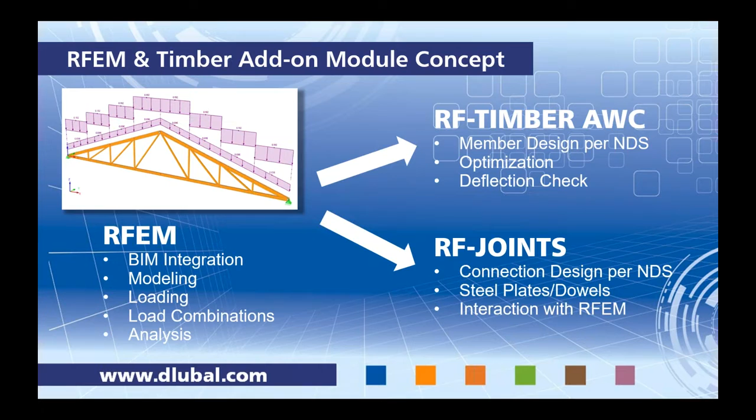The other add-on module, RF-JOINTS, as I mentioned, a new feature was added for the NDS code, both again ASD and LRFD for connection design. It's utilizing steel plates and dowels. And again, I'll show you the interaction that the add-on module can have with RFEM in regards to the actual stiffness properties of a connection and how that affects our internal forces. So with that said, we can jump directly into the RFEM model.

So for the sake of time, I did go ahead and create this general truss here, and I am in a 2D environment. So in order to create this truss, I used our structure generator. If we go up to Tools, Generate Model, under Members, you'll notice that we have several options here. A few of them are grayed out, and that's simply because I'm in a 2D environment. But for this example today, I used the 2D truss option. This dialog pops up. You can see all of the different truss types that we have. We have the option to set our diagonals, different directions, and the rest is pretty self-explanatory.

We simply give it the number of bays, the total length. It's a pretty large truss for today, so we set this at 85 feet and the total height at 15 feet. Then the program asks us to set the cross sections. So for the upper chord and lower chord, I just gave it general glulam timber members, as well as those specific properties for a glulam. I can press my little info button here to see the cross-sectional properties, a 6x12 for my upper chord, and for my lower chord, I modeled a 6x10.

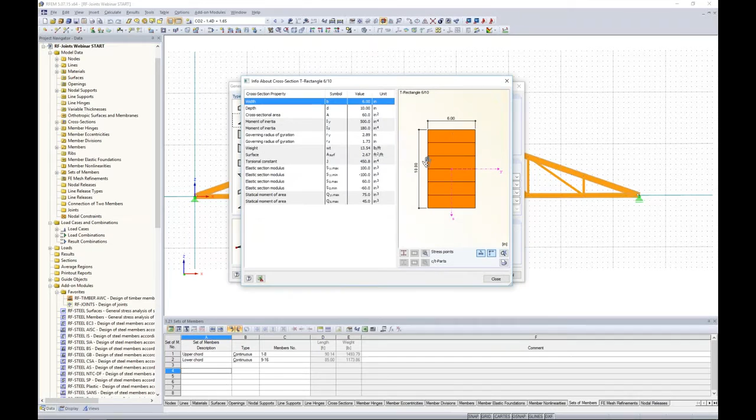For the diagonals and verticals, these are just more post members, 5 inch by 5 inch, Douglas fir larch, so a softwood here. Again, the member properties can be viewed. Now, the program automatically sets the member type to beam for the upper and lower chords, and you'll notice that the diagonals are set to truss.

For any type of modeling software, finite element, we typically have different member types. For our program, beam type is anything that would be a beam or column. A truss would be the same thing as a beam, but we've automatically applied the moment end releases to those members. So truss makes perfect sense for all of our internal members within this truss that we don't want to transfer any moment to our upper and lower chords.

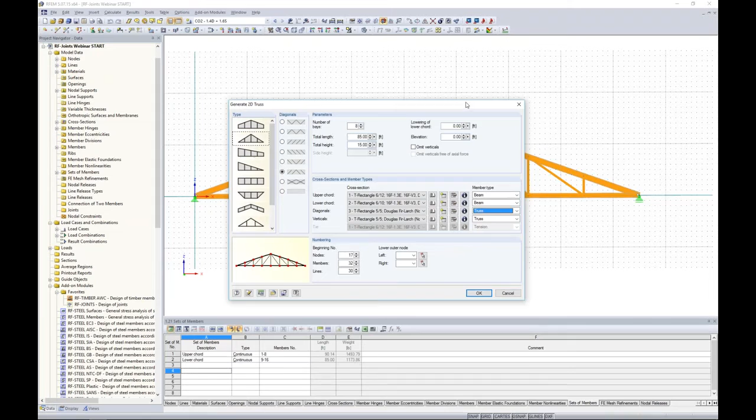So leaving these settings as is for the member type, we press OK, then we'll get the generation of our timber structure here. Then I did add a pin support on my left-hand side and a simple roller support on my right-hand side. Now, the other thing that we need to take care of is that when I did generate the truss, a fully rigid connection was available at the top of the truss, also on the left and the right.

So you'll notice that I've applied a simple pinned member end release for the top of my truss, just one of the members. You can do so by editing the member, double-clicking it. You'll notice we have member hinge at the start and member hinge at the end. I just created a moment release, which you can see here in the two-dimensional direction about the local y-axis. I did so at the beginning of the member on my left-hand side and the end of my member on my right-hand side. So modeling is essentially complete for this simple timber truss.

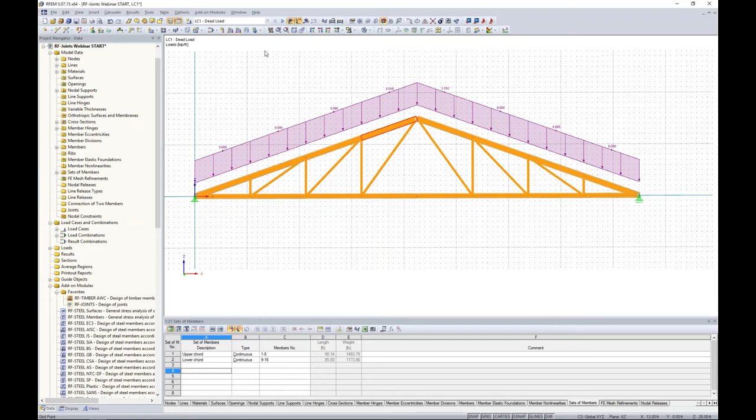I did also apply some loads, and I have two load cases. You'll notice in my drop-down box I have dead load and snow load. My dead load, if I display it, is just a simple member load, 0.08 kips per foot. The snow load, on the other hand, is 0.12 kips per foot in the projected Z direction. So we're taking into account this member angle and how that load directly applies to these upper chords.

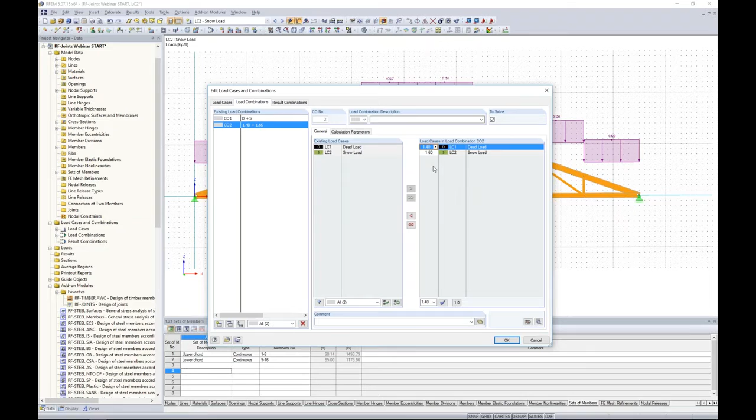Now I also created a couple of load combinations just manually, and maybe if we enter the load combinations dialog box we can see this. So we do have the options to automatically create these load combinations, like I mentioned, per ASCE 7 for example. But for the simplicity of today's example, I created two load combinations. The first could be considered an ASD load combination where my load factors are 1.0 for dead load and snow load. My second load combination is maybe an LRFD load combination where I have applied the load factors of 1.4 and 1.6. You can see in this drop-down box we have quick access to them, or we can overwrite them with whatever load factor we would like.

So now you have the ability to toggle between the load cases and load combinations, and we can run our first analysis. I can go to calculate all, and we'll see within a split second the model will be solved. So we are still in RFEM, we haven't touched any of the add-on modules yet. So once we run this analysis, in our project navigator over here, we have the results tab available.

And we can, for example, view everything graphically such as global deformations. We can change the display factors here. What may be a little bit more interesting is to take a look at our member internal forces. Here you can see we have our axial forces. We have some pretty high tension forces on the bottom, and high compression forces at the top, denoted by the negative magnitude sign here.

Taking a look at shear forces, I can always increase my member diagrams here. And lastly, we have our moments. We should have no moment transfer where I put in those moment hinges, as well as along our diagonals and verticals here. Same thing for support reactions. These are controlled here graphically within our results in the project navigator dialog box. And you have full control over colors, sizes of fonts just by going to Options, Display Properties.

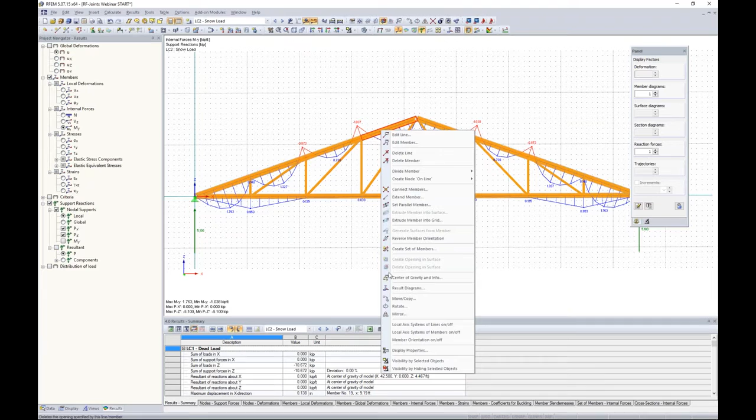Now, this is great graphically, but sometimes we want to see a little bit more information as it relates to the member. So we can always right-click on a specific member and choose Results Diagram.

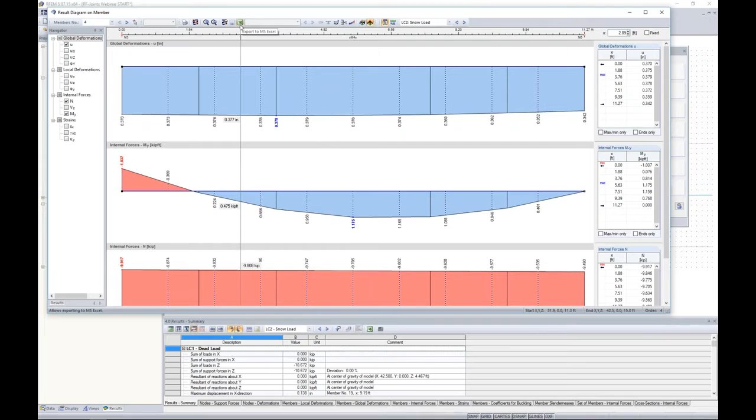Now you'll see the entire member here. We can turn on more graphs such as internal forces, deflections, and get a more realistic view of what's going on along the length of the member. You can print this off directly to our printout report. You can export directly to Excel for further sorting. So a lot of powerful capabilities in just viewing our analysis only.

So now that we have run a full analysis, that's great, but typically as design engineers, we want to move on to code checks. So this is where we are going to make the clear distinction that we're going to utilize an add-on module. In the data navigator over here, you will see the long list of add-on modules. We do work in the add-on module system because we really want to cater the software to your needs. Not everybody is going to be in the Chinese steel design, for example, so why should you pay for it? So we, again, are trying to cater towards your specific design needs.

We also have them organized a little bit better with this add-on modules drop down at the top here according to the different materials and applications, dynamic analysis, things like that. So for today, we will launch the RF-TIMBER AWC. Now, to begin with, you'll notice we have both ASD and LRFD, so that's nice. Some other software programs for timber design only give you ASD, for example, so you have complete control over which design method you would like to run. Today, we will choose the LRFD.

Now, the ultimate limit state design, you'll notice that my load combinations and cases were brought in from RFEM, so I don't need to redefine any of that. So ultimate limit state, we'll choose our LRFD load combination, and serviceability, we will choose our ASD load combination.

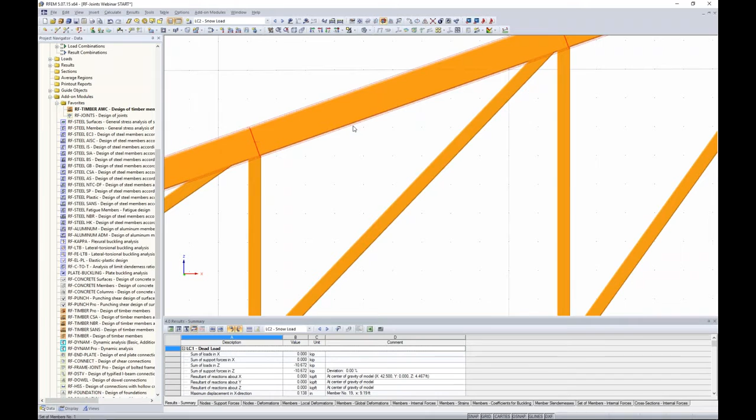Now, the next thing to go ahead and define are which members or sets of members would we like to design. So let me quickly explain that when we go back to this add-on module, if I zoom in here, the program automatically created a set of members with the truss generation for my bottom chord, and I also have a set of members for my upper chord. What I wanted to mention is if you do zoom in, you can see a faint dotted line around it. I know that's hard for you guys to see, but if you were in the software, you'd be able to hover over that and see it's a set of members.

A set of members will essentially be designed like a continuous beam. You know, we don't want to optimize one of these individual members different from its adjacent members. We want to get a code check for this entire bottom chord. So that's where the sets of members comes into play.

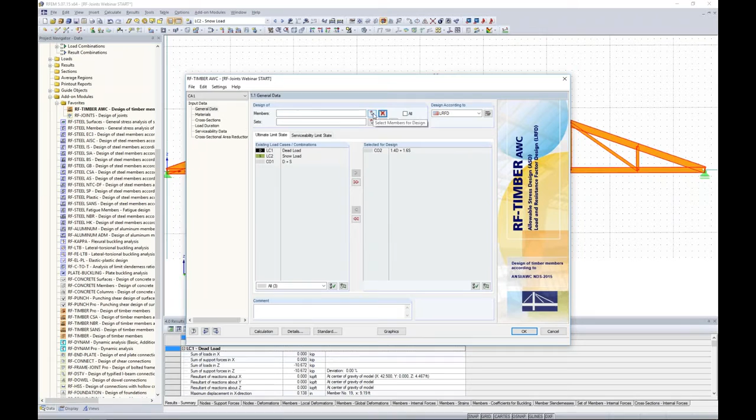Now the default is to select all members. I'm going to clear this, and for my member design, I'll scroll in here and I can just use my selection box, similar to what you would find in AutoCAD, for example, to select all of my internal diagonals and verticals for my member design. And for my sets of members, I simply choose graphically the upper chord and the lower chord, and we click OK. So now we have the distinction between members and sets of members for what we'll be doing for design purposes. Now all I need to do is to simply move down the list.

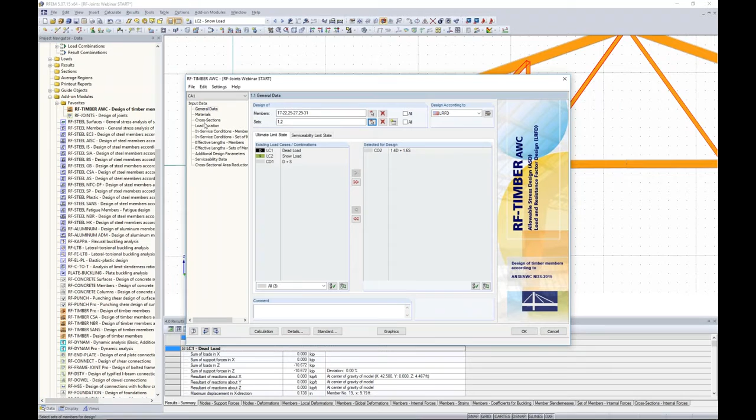Next we will go to materials. Again, everything is brought in from RFEM, so I don't have to redefine my materials, my geometry, my cross sections. All that we're doing in this add-on module is giving some further design information related directly to the NDS code.

Now you'll notice that we have two bright red materials here, and that's just because when I open up a new model, concrete and steel are defaults within the program. I can delete these back in RFEM if I wanted to, but all the program is telling me is that these are not applicable in the Timber add-on module. That makes sense. But our two materials that we did define to our members back in RFEM are applicable. I can click them and view all of the material properties that will go into the design of this member.

Again, cross-sections, same concept. The member cross-sections are brought in from RFEM. I can view some of the cross-sectional properties here if I'm interested in them.

We can move on to load duration factors. We assign dead load and snow load to the applicable loads that I applied in RFEM. The program is smart enough to know what load duration factors to apply. We can always use our drop-down box to adjust these, but even more so, there is the standards button down at the bottom of the dialog box, which will show you every single factor going into the design process within this add-on module, such as the load duration factors.

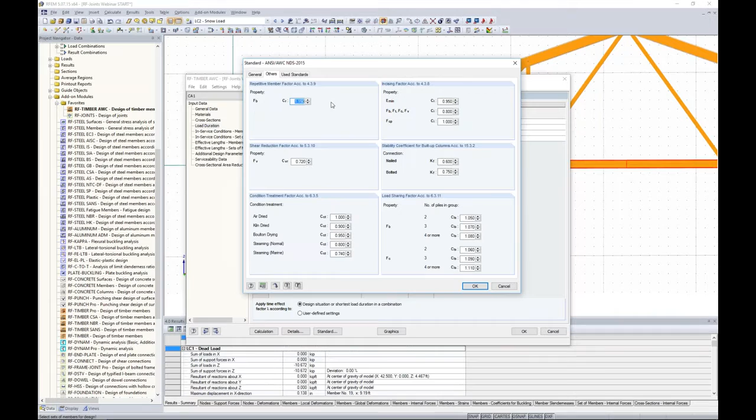What is nice is that you can adjust these if for some reason you don't fall between 10 years and 2 months, but somewhere in between. That's completely up to you. You'll notice other factors such as temperature factor and wet service factor. If we go to the others tab, there's repetitive member and shear reduction factors. Again, this is all the information from the code. Under used standards, we list which standards are being utilized for the design, and at the end we give you references to these standards as well.

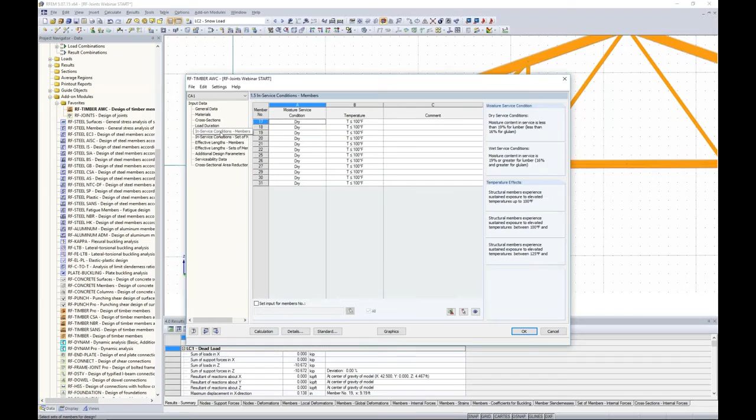Moving down the list to in-service conditions, this comes from our standards button, moisture service conditions - are the members dry or wet? Our temperature ranges, we can change these if we'd like. You'll notice we have 2 separate tables for members versus sets of members. This is so we don't group everything together. I think it's laid out a little nicer when we separate members versus sets of members, and then we can control those factors individually.

Effective lengths for members - this is stability checks. You'll notice we have buckling about the weak axis, buckling about the strong axis, and lateral torsional buckling. I'm going to assume for all of my internal diagonals and verticals that buckling about the strong and weak axis, as well as lateral torsional buckling, is a concern. So I'll leave everything as is and let the program determine if this is okay based on my design.

Now the effective lengths here default to the full member length, but you can easily control these lengths by typing it in or graphically using the measuring tool here, so you have complete control over this.

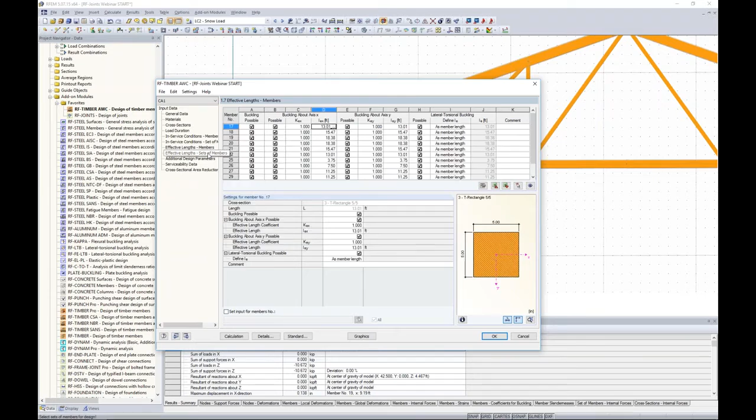Our sets of members is on a separate table. For my upper and lower chord, I'm going to assume that I have complete lateral bracing along the length of the member. So weak axis buckling about the local x-axis, which I have my axes shown down here, is not a concern. And it would be the same thing for my lateral torsional buckling - this is not a concern based on my connections or lateral bracings.

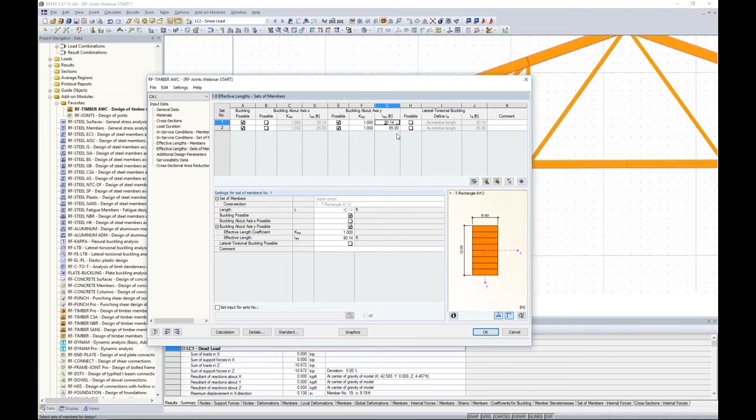All I have to do is simply uncheck the box. Buckling about the y-axis or strong axis, I am still concerned with this, but right now it's set to the full set of member length - so it's pretty large, 90 feet and 85 feet. Maybe for uplift wind purposes, I have much smaller unbraced lengths - for example the upper might be 3 feet and the lower 3.5 feet. As a design engineer, you always want to pay careful attention to your unbraced lengths because this significantly affects our stability design.

Moving on to additional design parameters - this is shear reduction factors, edge bonded. This refers to our glulam members for our upper and lower chord members. We have the code references here, and again the standards button will tell you what those factors are. If we scroll down further, here's our incising factors and repetitive factors for our post or brace members within the truss.

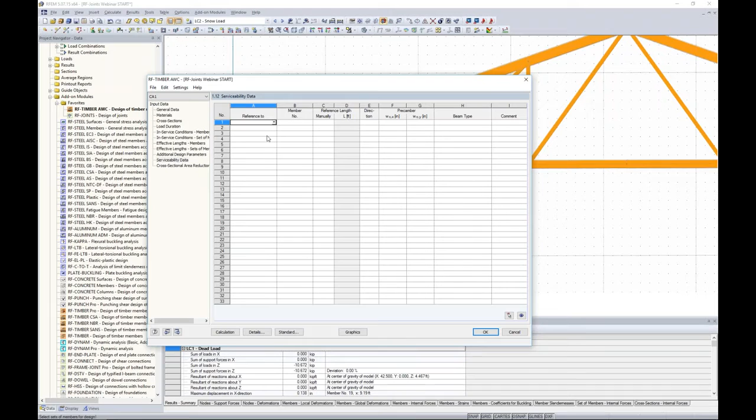We can move on down to the serviceability data - here is just deflection checks. We can check every single member in our model, or maybe we're only concerned with checking a couple of members. For this example, I'll graphically choose perhaps one of my diagonals that I want to check deflections for. I click OK - the manual reference length is set to the full length of the member, that's fine. Do I have a pre-camber? If so, I could put this in here. And lastly, I need to specify if this is a beam or cantilever.

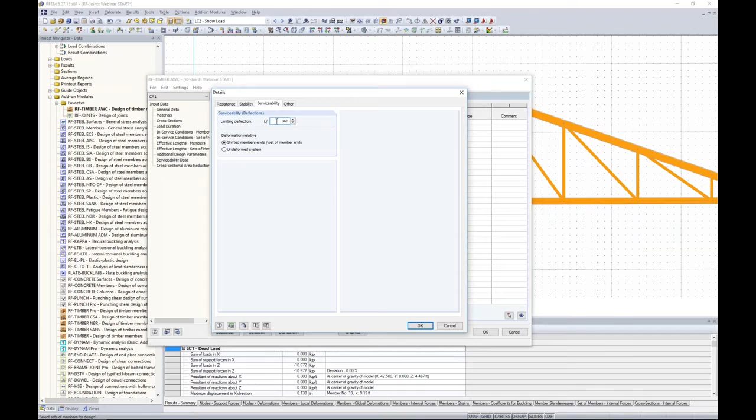Now I can do the same thing with a set of members - maybe I'm interested in my bottom chord deflection. All I need to do is graphically select my bottom chord here. The full reference length is set at 85 feet, and again we just use beam type beam. Now the question is, what deflection ratios am I comparing this to? Where can I control that? Well, under the Details tab under Serviceability, here's my limiting deflection ratio - you can see the default is set at L/360. Now for cantilevers, it will always use half of this ratio that you set in here.

Then you need to specify whether the deformation is relative to the shifted member ends or the undeformed system. This may be better known as relative versus absolute deformation. This is where we can control this limiting deflection ratio and change that if we'd like to.

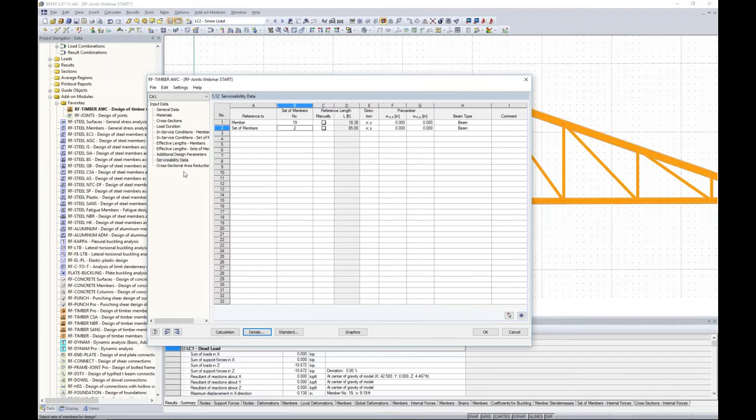Lastly, we can move on to the cross-sectional area reduction. This is if we have a notch within our member, maybe at a connection at the ends, or maybe the member is sitting on top of a wall or another member, and we have to take this cross-sectional notch out. We can account for this by selecting the member graphically, then giving the notch location, whether that's the start, the end, or within the inner span. Then we give the notch the geometry, and the program will automatically account for that cross-sectional area reduction. It's smart enough to only compare internal forces at this notch location for design purposes, meaning we don't have to reduce the entire cross-section of our member and get an over-conservative design. Just a nice additional feature if you have this scenario.

For our case, we won't do that today. Now, before running the calculation, I want to quickly run through the rest of the details tabs, to see what's exactly going on behind the scenes with some of these other options.

The first one under resistance is consideration of connections, the reduction of limit tension stresses. If I check this, it means we can account for the occasional weakening of a cross-section at a connection. All I need to do is select a node, and give the connection length, maybe 6 inches or 1 foot, and I can reduce the stress ratio inside that connection. The default is set to 60%, and the stress ratio outside the connection can be kept to 100%. Now when we're looking at our design, the program will flag you if at that particular node you're exceeding that 60% stress ratio. Just an easy way to take into account the weakening at a particular connection of your cross sections.

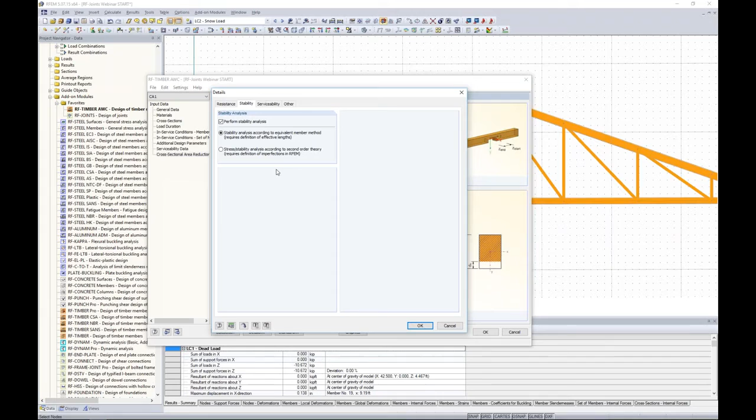We're doing a stability analysis according to the equivalent member method. The NDS says to take into account secondary effects within the design phase for our structure. This is very different from steel, for example, which tells us to take into account secondary effects in the analysis section, so things like P-delta, stiffness reductions, and notional loads are all taken into account in RFEM. Timber is different in that we have these factors added to our bending capacities.

Back in RFEM, if I open up my load combinations, you'll notice that under calculation parameters, it is always default in the program to run a second order analysis for our load combinations. This will take into account P big delta and P little delta.

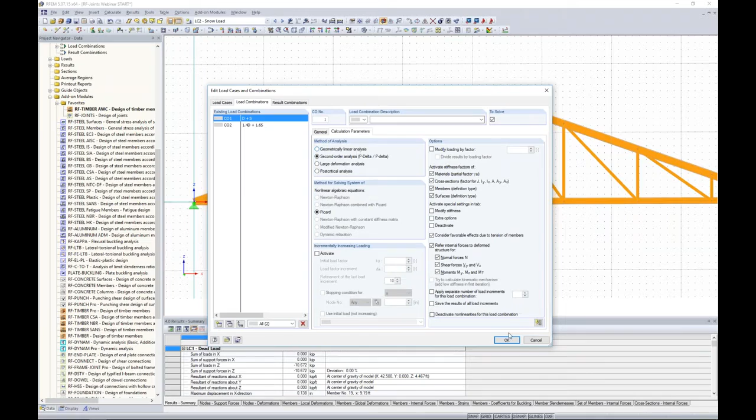So perhaps you have an existing structure, or you're just really close on your design checks and you don't want to increase your member sizes. Technically, you can go back into RFEM, change this to a geometrically linear analysis, and then take into account these second order effects within the add-on module only, the design part. Now, it is typical for most engineers to just leave on P-delta analysis in RFEM. Therefore your internal forces are a little higher, but it's a more conservative route to take.

The other option here is stress stability analysis according to second order theory. It requires definition of imperfections in RFEM. If I check this, I'm telling the program that under effective lengths, the buckling for strong and weak axis will be taken into account with the analysis, maybe with stiffness reductions or notional loads, imperfections, things like that. With lateral torsional buckling, there's no way to take that into account on the analysis side, so I'd like to still do a check with that on the design side. Regardless, today we'll stick with the default of checking our strong and weak axis buckling.

Serviceability we've already been through, and on the other tab, cross-section optimization. Design ratios are maybe more around 0.8, possibly 0.9, typically not 1.0. So for optimization of your members, which I'll show you in a second, you can change this to 0.8, for example, for design purposes.

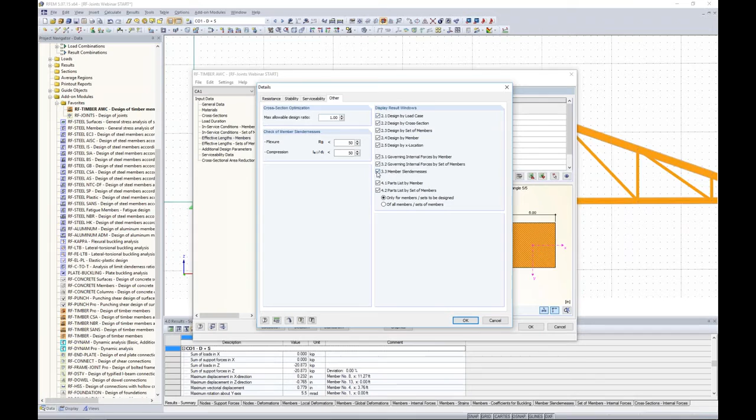Check of member slenderness. If member slenderness is a concern, here are the ratios we have set according to the code for flexure members and compression members. You'll need to activate 3.3 member slenderness here for our result windows if you want to check for member slenderness. That's pretty much the concept for all of the input data, and now we're ready to run our first calculation.

You can see that it solves within a quick second. All it's doing is bringing the internal forces into this add-on module from RFEM, and we apply the NDS code for our design. Now we have our results tables available, and we can view the design by load case.

We can view design by cross-section - we have three different cross-sections here. Maybe we want to view design by sets of members or by each individual member. What's also great is that as I'm clicking through these tables, it's synced to the graphics view in RFEM. Even the X location of my controlling internal forces line up with my tables here.

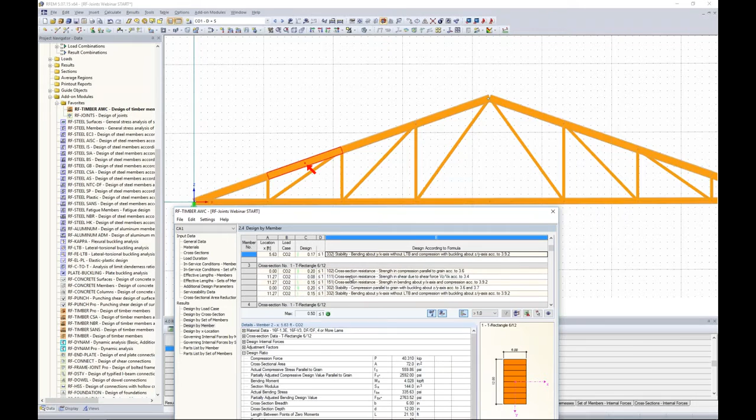Something else I really pride ourselves on, because I know this isn't available in a lot of other software, is that we give you the code check for everything within the NDS. So we're not just giving you the controlling code check for each member, but you can actually scroll through and view the different checks individually. Even more so, we give you all of the variables that go into that code check, as well as the equation references. So if you have the NDS code right in front of you, here's the equation for your C sub P factor - you can quickly flip to it and understand where those numbers are coming from. A very powerful feature.

Now you can always export directly to Excel to do some further sorting, and as you can see, we have this nice big green smiley face because our design check is only at 0.5. So it looks like we're doing quite well with our design. We can also view some of the governing internal forces by member if you're interested in that.

And lastly, we have a parts list by member, or a material takeoff.

As far as optimization, just to quickly touch on that, if we go back to our cross sections table, you'll notice that the max design ratio for each cross-section is given. I think we can see that our top chord is pretty low, 0.22.

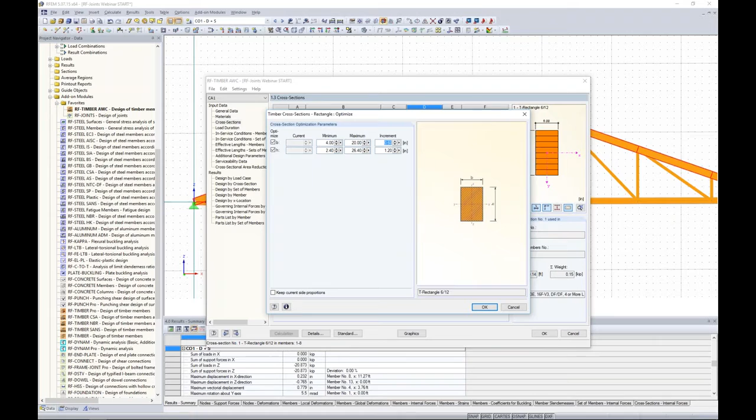So maybe this isn't an ideal cross-section to have, and rather we'd like to optimize to something more like 0.8. We control that under our details setting, where we can choose the option to optimize. When I click yes, all I need to do is give the program some dimension ranges for both my width and my height, like maybe 4 inches to 20 inches with an increment of 0.5 inches. Then we rerun the calculation, the program will optimize, and we can continue on using these new section sizes.

For connection purposes, I'm not going to do this, so we'll just stick with the design that we're given.

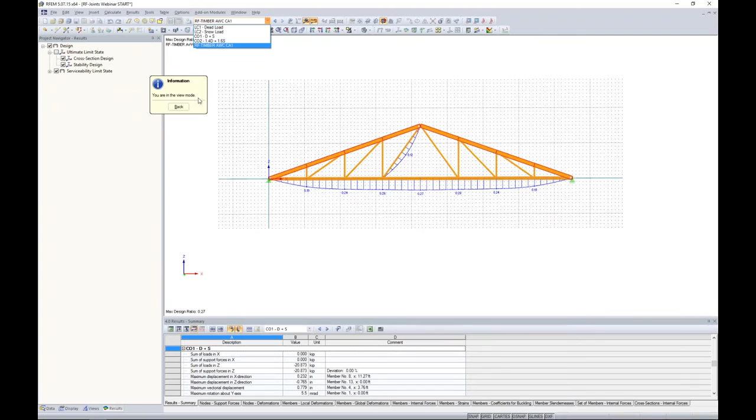Lastly, we can view everything graphically. We're back in RFEM, but we're still technically in the add-on module, which you can see from the drop-down box and this little dialog box here. We're still in RF-TIMBER AWC. So I can view my ultimate limit state designs, which you can see graphically here, and I can turn on my panel.

Well below 1.0, we can print these off. Serviceability we can take a look at. Remember, we only check serviceability deflections for our set of members down at the bottom and one single member here. So graphically, we can view everything rather than just the tables.

So that basically sums up the member design. And the next thing that we want to move on to is connection design.

So I can go back to my data tab, and I have my other add-on module here, RF-JOINTS, and I will launch that. Again, just another simple dialog box, which is the add-on module, taking in all the internal forces into this add-on module. We just need to further specify some information.

You'll notice that we do have steel and timber. Unfortunately, at the moment, steel is only per Eurocode design, but at some point in the future, we do plan to add AISC as well as CSA steel connections.

But what is exciting is that we did add the NDS 2015 for our timber connections. You can see we have both ASD and LRFD available. Maybe to just continue on from our member design, we will stick with LRFD design. We have steel to timber connections.

Now the joint categories, we either have general dowels we can choose from, or you can also see that we have bolts. For today, we will be going with general dowels.

Now, 3 different joint types. We have the first joint type, which is main member only. Maybe you have the cantilever of a beam from a wall, for example. Well, that would be applicable for this type of connection.

The second connection type would be with a continuous member and a second member framing in. That might be something more like this connection here, where we have our continuous upper chord and we have a vertical framing into that continuous member.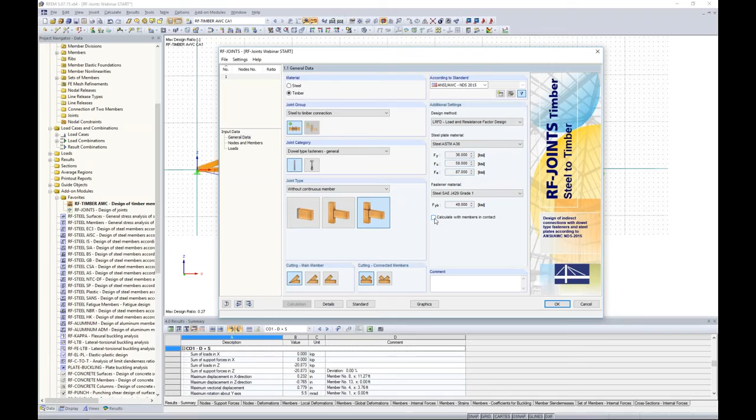So we don't give you design for these members in contact, but it's just an additional check to notify you if we do have some extremely high pressures from one member to another. So again, we just simply work down our list here.

We'll move on to nodes and members. Now in our graphics view, you'll see our truss brought in from RFEM, and nothing's highlighted right now since we haven't selected any nodes. This can be imported from the structural model, or we can set it manually here. If we choose set manually, this allows us to define any type of connection we want, including materials, cross sections, and different angles, so we don't have to use what we modeled in RFEM.

For today, it makes more sense to import what we've already modeled in RFEM, so we can do a further connection design here. The first thing I want to do is choose the nodes I'd like to consider for my first connection. I'll choose node number 1 on my left and node number 2 on my right. These will be identical connection designs.

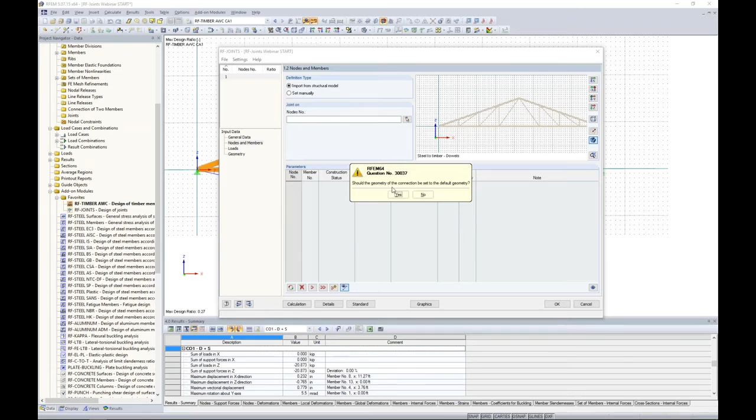Should the geometry of the connections be set to the default geometry? Yes, I want to bring in what RFEM already has modeled. Now you can see I can zoom in here and my members are highlighted at that particular connection. At node number 1, the program automatically assigned the connected member to member number 1. Using my dropdown, I have connected member, main member, inactive. Member number 9 at the bottom is set to the main member. My materials and cross sections were automatically brought in from RFEM, and even my angles were automatically determined, so I don't have to worry about redefining that information.

Quickly jumping to geometry, our picture of the connection will be populated here, and I think we're all in agreement that this is not the ideal connection. Nobody would cut these two members right down the middle and create a connection looking like this. So how do we change this? Back on the General Data tab, this is where the cutting of the main member and connected members is affected. I'll change this to the second option, which you can see here graphically.

Now jumping back to my geometry tab, this is looking a little bit better. But ideally, all of these internal forces from our upper chord should be bearing down on our bottom chord. Timber isn't very strong when considering these internal forces bearing down here, so I want to flip-flop these, so to speak.

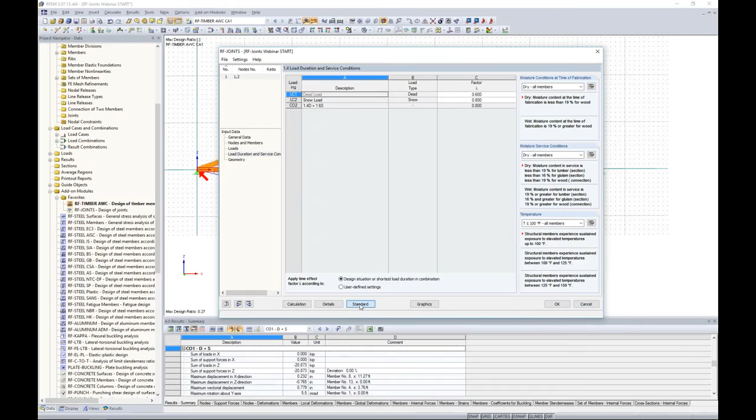So now that we've defined our geometry under nodes and members, we can move on to loads. What load combination would we like to use for design? Since we're doing LRFD design, I'll choose my LRFD load combination. Load duration and service conditions should look familiar from our AWC member design module—things like load duration factors, moisture service conditions, and temperature. If we pop open this standard, here's where we can see all the different factors applied for the connection design.

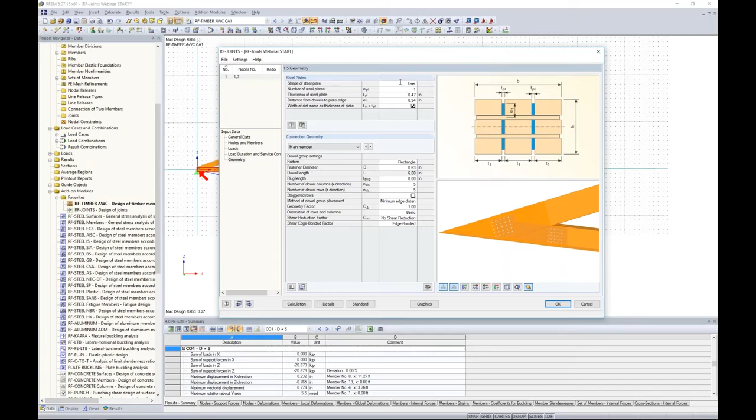We can scroll through these—everything's coming directly from the NDS code. Lastly, moving on to geometry, this is probably the most important part, because here is where we define our dowel layout and our steel plate layout. It's pretty self-explanatory; all I need to do is work from top to bottom, filling out each variable. Now, the shape of the steel plate—the first option is user-defined, which you can see is basic, just rectangular sections at my upper chord and lower chord.

The second option is Convex Hull. What the program will do is its best attempt to simply connect these two rectangles with a straight line. So maybe this is something a little bit more similar to what we'd see actually fabricated. That's an option if you'd like.

The third option is rectangle. You can see this is not ideal for our connection today, but this could be ideal for another scenario. We'll just stick with this user-defined connection for now.

Now the number of steel plates can vary anywhere between 1 and 5 steel plates. For the first run, we'll stick with 1 steel plate. We do need to give the thickness of the plate. We'll set that to 0.5 inches.

Now the distance from the dowels to the plate edge, E1, we do our best to give you all of these variables graphically as well, so you can understand exactly what information you're entering in here. So for that edge distance, we will set that at 1.2.

Now, is the width of the slot the same as the thickness of the plate? Well, if this was not, then I could specify the slot thickness different from the thickness of the plate if I would like to.

Moving on to the connection geometry, you can see that we have the main member here, or we have connected members. So we first want to start with our main member. The pattern will always be rectangular.

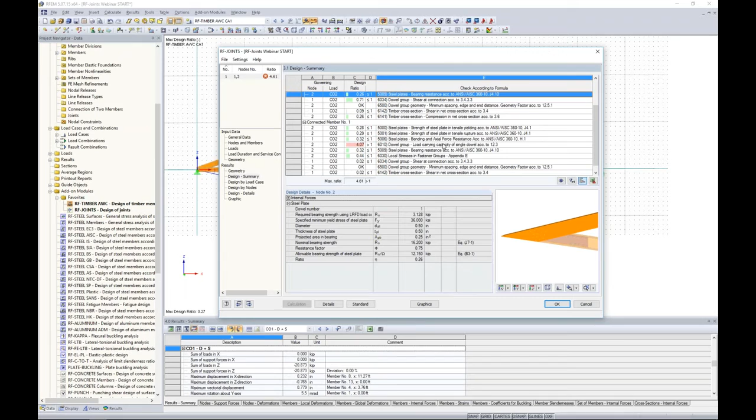Scrolling down to my connected member, I obviously have a huge problem here as well. My load carrying capacity of a single dowel is exceeded.

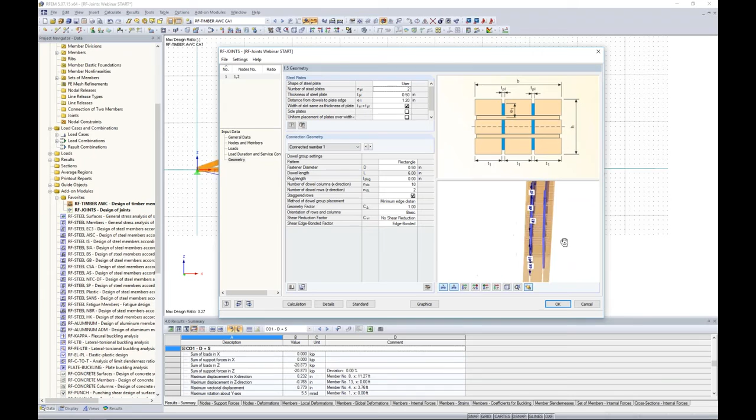So before checking out the rest of the results, let's go back to our geometry and make some changes. Maybe the first change is I'll add an extra steel plate. It's asking if I want to delete my results - yes, that's fine. Now I can rotate this view around, and you can see these steel plates are shown graphically quite nicely.

There are a few other settings that came up with adding 2 steel plates. For example, we can set these as side plates if we wanted. Rather than being embedded within the glulam members, you can see now they are side plates. For us, we'll uncheck this option. The third option is uniform placement of plates over the width, which you can see from this cross section. If I uncheck this, I can set my distance between the plates, T2, here in the center - maybe something more like 2 inches. So you have control over that, and it doesn't necessarily need to be the same width for all 3 dimensions.

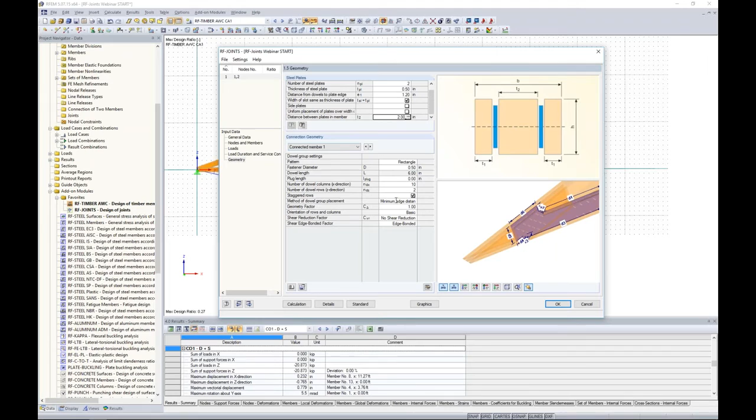Looking at our connected member number 1, I'm going to leave most of this as is except for the method of dowel group placement. Sorry, I want to switch this over to the main member first, so we'll scroll in here to our main member.

Now, instead of the minimum edge distance, I'm going to choose a user-defined setting. The distance between dowel columns, shown graphically here for reference, we'll set at 5 inches. The distance between the rows we'll change to 2.5 inches. And the distance from the loaded end to the dowel, A3, we will set to 6 inches.

Eccentricity - if you want to move this connection up or down, you can do so with the eccentricity setting. Everything else will stay the same for this main member.

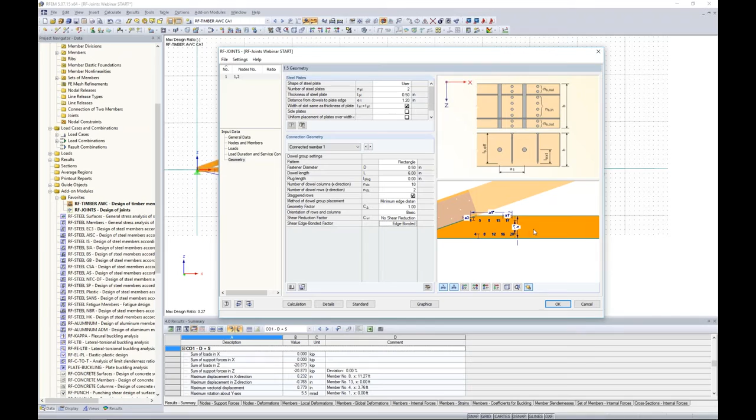Connected member number 1, remember we're extremely overstressed here - there were pretty high tension forces on this lower chord. So maybe I want to space out these dowels a bit more to get more capacity down here at the bottom. We did add a second steel plate, so that will help us as well.

Instead of the minimum edge distance, I'll use user-defined settings here too. My distance A1 between dowel columns I'll set to 5.0. The distance between rows will be 6.0, and the distance to the edge, A3, will now be 6.0 as well, with no eccentricities. Now that I've made these adjustments, we can rerun the calculation with this new geometry to check our results.

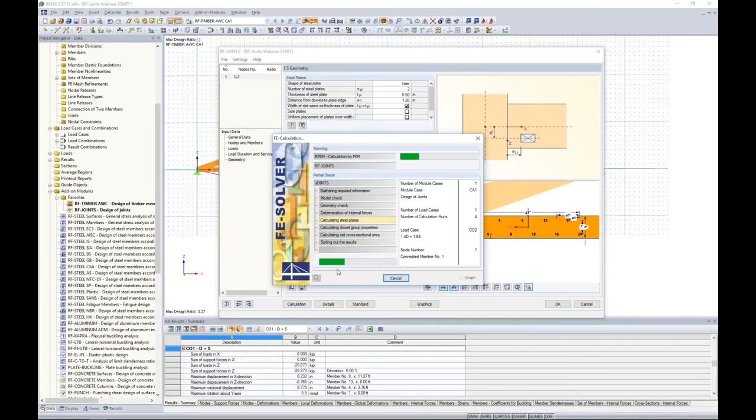It looks like we're still slightly overstressed at 1.23 - well, at least we're doing a lot better than the 4-point-something code check from before. So we're almost there. If I scroll down to my connected member, I'm now at 0.8 as my controlling code check for load carrying capacity. That's great for design purposes.

So I think we're done with that connected member, but we still want to go back and address the main member quickly. Maybe I don't want to add any additional dowel rows or columns - I'm content with the size of my dowels. So what I can do is simply uncheck my staggered setting.

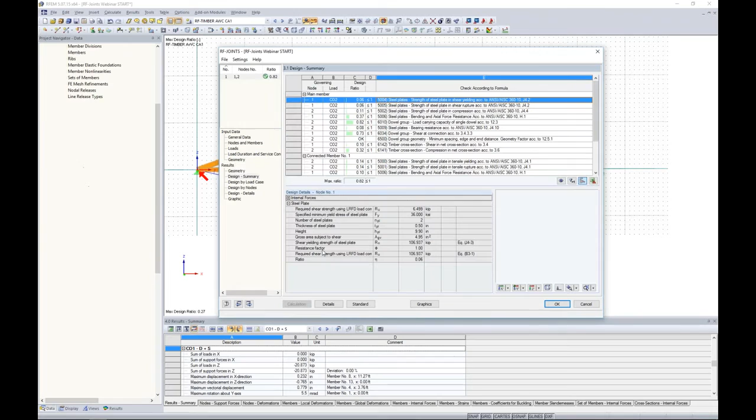It's asking if I want to delete my results - yes, that's fine. So now instead of staggered rows, I have a true 8 columns and 4 rows, meaning we have a few additional dowels added to this connection. We'll run the calculation again, and I think we'll see now our controlling code check is 0.82, which is good for design purposes.

So now taking a look at some of the other design tables that we have, design by load case here. We only have one load combination we're solving for, design by the 2 nodes, node 1 or node 2. Maybe the most user-friendly table would be this design details. Here you can see that the ratio checks are set in descending order from the most controlling to the least controlling, but we also have the checks for minimum edge distances and dowel spacings.

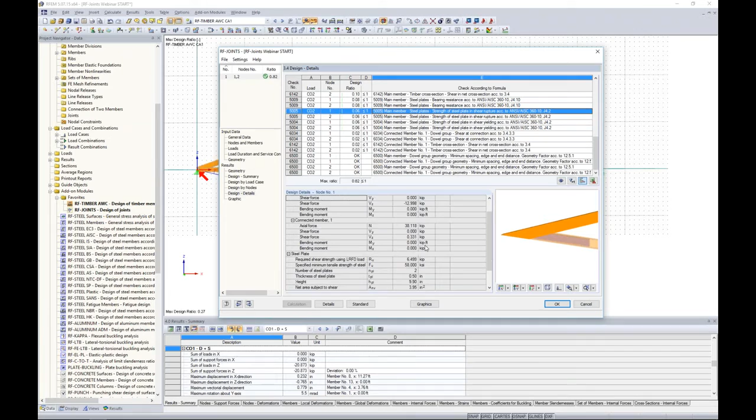And again, everything is as transparent as possible with the code equations and references. Even the internal forces that we're designing for at that particular location are listed. Our geometry here is just the geometry of the plates. Most of this was in user input, but things like the slip modulus for the fasteners, the slip modulus for the connections, things like that.

Now, our last graphic here is pretty powerful as well. Obviously, we're not a program that's going to give you shop drawings or fabrication drawings for these steel plates, but what we can do is provide you a quick link to create a DXF file for this connection. So you might want to be doing additional drawings in AutoCAD, for example. Well, at the click of a button, you can create that DXF file if you would like to. So again, a pretty powerful feature here for our connection layout.

So that sums up the first connection design, and real quickly we can go to graphics, and the program will automatically bring that connection back into RFEM for the graphic view. We can even rotate our member around and see the dowels and the steel plates in there. So in terms of actual rendering, everything is shown there.

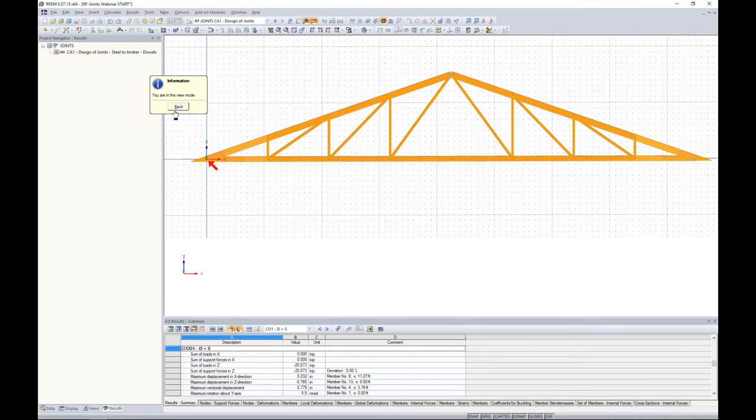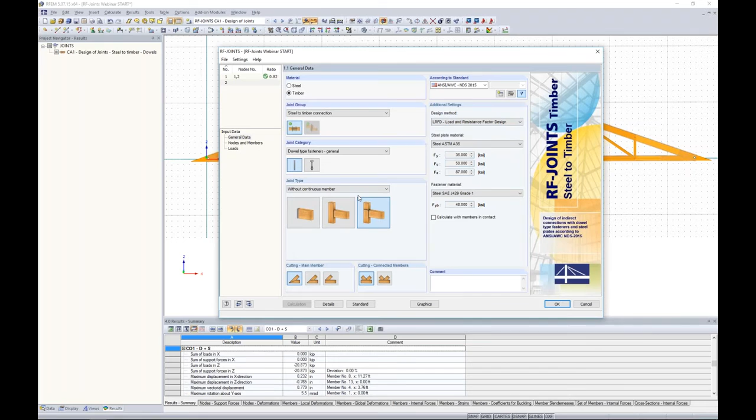Going back to the add-on module, I'm going to do a second connection design pretty quick. So we'll just create a new case here. You can rename it if you'd like. And again, just jumping through some of this user input entry that we've already been through, we'll create without a continuous member. We are doing LRFD design, and everything else we can keep as is. The nodes and members for this connection, I'm going to choose the top of my truss. And I click OK. Should the geometry be brought in from RFEM? Yes.

Now you can see that we have 4 members for this connection design. The program automatically assigned the connected members and the main member to the individual members that it brought in from RFEM. So how do we think this connection will look with how the program assigned it? For this, we jump back to our geometry tab and we take a look at our connection, and I think we can all agree that this is a pretty big mess. This is certainly not what would ever be created by the contractor, for example.

So we can adjust this back under our nodes and members, and the main member right now is set to this brace. Instead, I'm going to set the main member to my upper chord. Now my brace, I'm going to change this to connected member, and the program has automatically rearranged all of this, so we'll jump back to our geometry, and this connection looks much better.

Now, one quick note about this, when you have multiple members, you'll notice that we now have priorities. So it looks like the program automatically assigned the correct priorities for now, but let's say the other upper chord here is assigned to priority number 3. Well, again, jumping back to my geometry tab, we have a mess again.

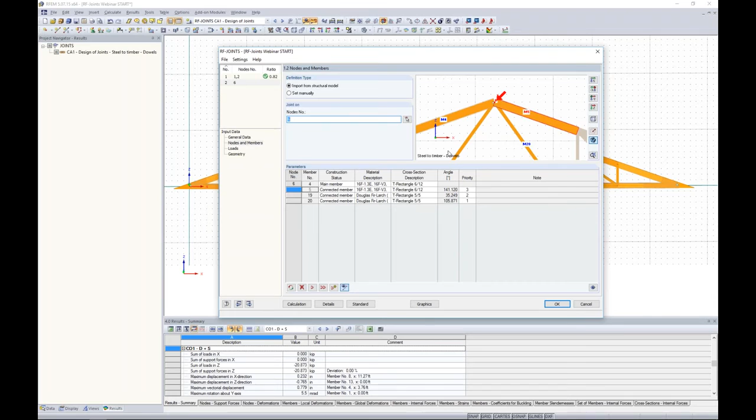So if you're not seeing what you like, you can just make some further adjustments rather than what the program automatically set these members to, whether that's in the nodes and members or under the cutting of the main member and connected members. So eventually you'll get the connection that you would like. It just may require some adjustments here. So for now, we'll change this back to priority 1, and we should be good to go.

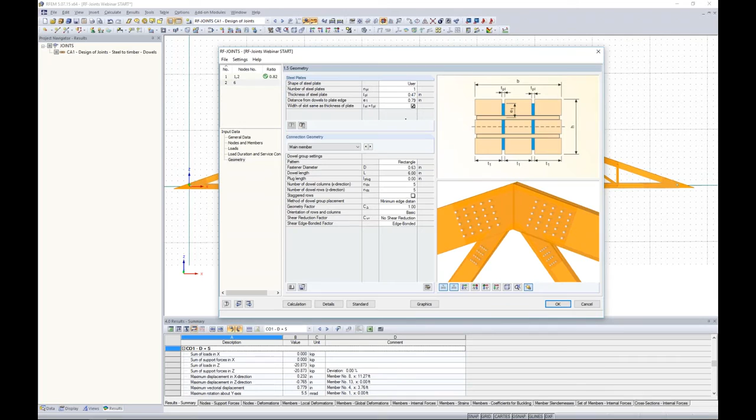As far as loads, we're choosing our LRFD load combination, the load duration and service conditions. We're not changing anything here. We'll leave this all to default. So real quickly, since we've been through most of this, we will just fly through some of the user input for our connection data. I'm going to automatically assume we're going to need 2 steel plates here. The thickness of the steel plate will be 0.5 inches. The distance from the dowels to the plate edge will be 1.2.

This dimension here in the middle, I'm going to again set this to 2 inches, so this coincides with my connection at the bottom of the truss too. My main member here is the first member I'd like to create. The fastener diameter, 0.5 inches.

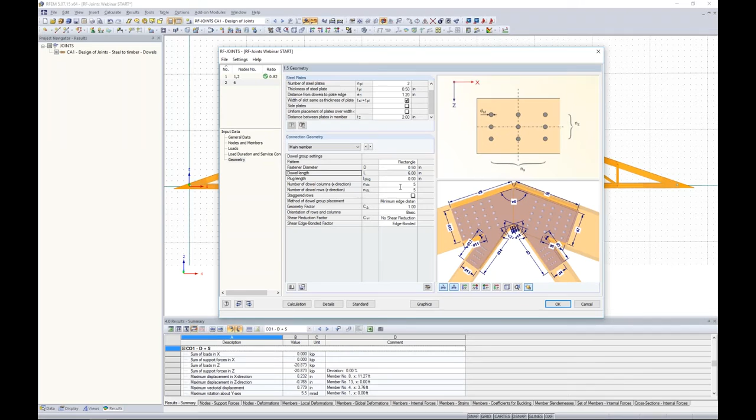The number of dowel columns, I'm going to set this as 8 columns, and we will set this as 3 rows. I will utilize a staggered effect here, which we can change around our dimensions to view this a little bit better.

And I'm just going to go with the minimum edge distance. So now that I've defined this main member on my left, my upper chord, I probably want to do some same setups for my upper chord on the right. So how do I quickly do this?

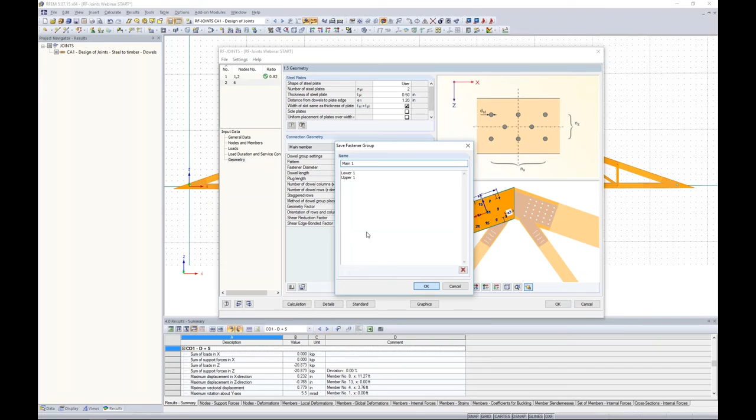Well, this is where we allow you to actually save the fastener group to the library. So here is where I can give it a name, such as main 1, for example. I click OK. Now I use my drop down to go to connected member number 1. All I have to do is open up my fastener library, click on main 1, click OK, and everything is updated automatically according to what I just saved.

Now what's nice about this is that this fastener library isn't just for this model we're in right now, but you can save fastener connection layouts between different RFEM models. So it's a little bit more efficient than manually going in and redefining this, especially if you're doing a lot of structures with similar layouts. That's a nice feature.

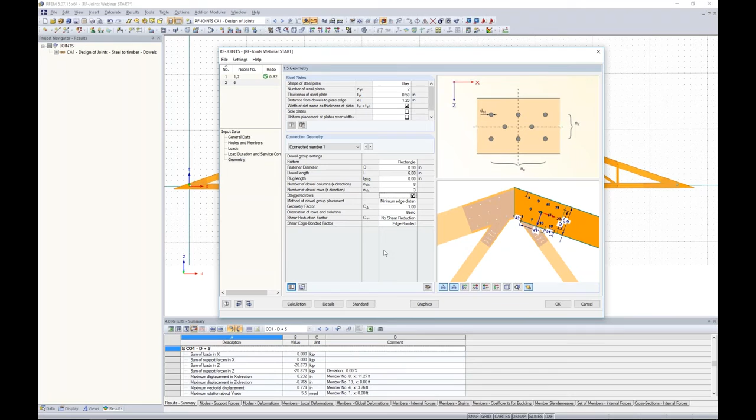Now dropping down quickly to the connected member, you can see this is a pretty slim member here. So we want to define our settings accordingly: 0.5 for the fastener diameter, and for the number of dowel columns, we'll set this equal to 6, but I only want 1 row. Now the staggered effect, you can see, really doesn't matter whether I have this checked on or off. The minimum edge distance, we'll leave this the same.

You will see that now we have the option for member eccentricity in the X and Z direction. So if I physically want to move this brace member to the left, to the right, up, or down, I can change that here by simply adding in that distance. Keep this in mind, because I'll show you in a minute how to export these eccentricities back into RFEM. For today, I'm not going to put any eccentricities in there, but just know that's an option if you don't quite see the layout that you would like.

What's also impressive is that the program automatically knows this is not a glulam member, simply based on the material settings alone. So now we have things like the incising factor, repetitive factor, and size factors for this simple post or brace member that are applicable. Again, you don't have to manually apply these factors, but the program knows they automatically have to be assigned according to the NDS code.

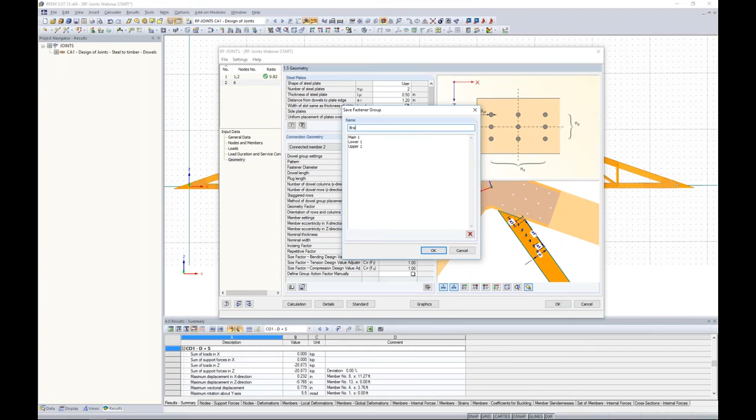Again, we'll just leave all of these as default according to our standards button down here. We can save this again; we will call this one brace 1. Now I drop down to my connected member number 3, I open up my library, I select brace 1, I click OK. Everything is automatically updated. So a very efficient way to pull up the already-defined member settings from the other brace.

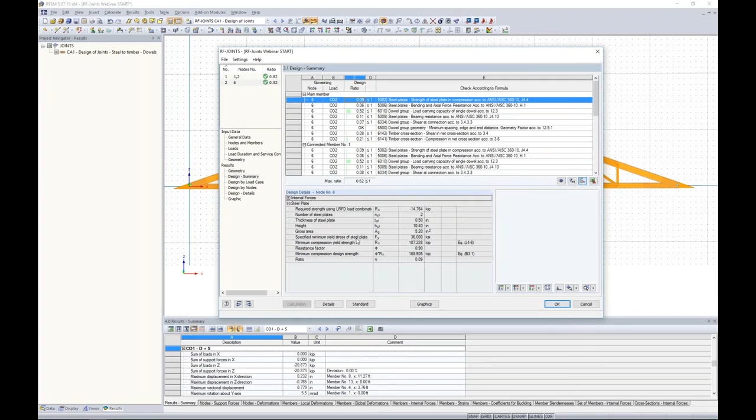Now we're ready to run a calculation. Again, it solves rather quickly. You can see that this brace connection went over a little bit better than the last one. We have a controlling code check of 0.52 here. So everything looks great in terms of that.

Again, we can view everything graphically for this connection here. Under the drop-down box, you'll notice that we have our first load case for our joint and our second load case. Right now we're in the second load case viewing this connection. Again, I can rotate my view here to see these steel plates embedded within my glulam members.

So that really is connection design, but the last thing I want to show you is the interaction of RF joints with RFEM. What do I mean by that? Well, under the details, we have the option to generate the member eccentricity. Remember with the braces, I told you you could move that in the global X or Z direction. Well, with this option checked, the program can automatically export little rigid links to move that brace back in RFEM, whichever way you specified in RF joints.

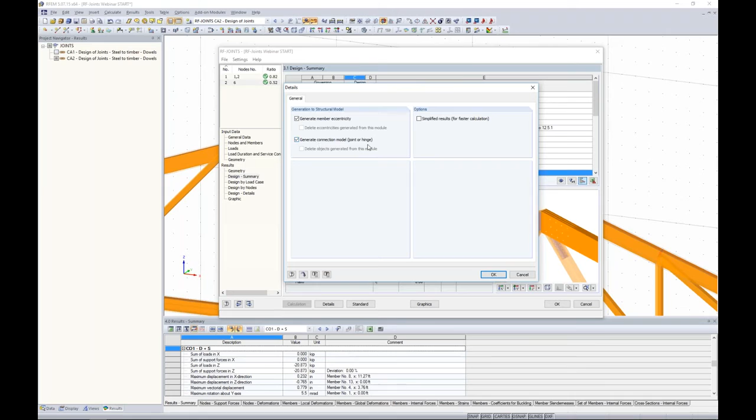Now, I'm not utilizing that today, but what I am going to utilize is the generate connection model of a joint or a hinge. Before I do this, there are some prerequisites, and if you don't do this, you will get some simple warnings within the program. So if you forget this part, the program will remind you.

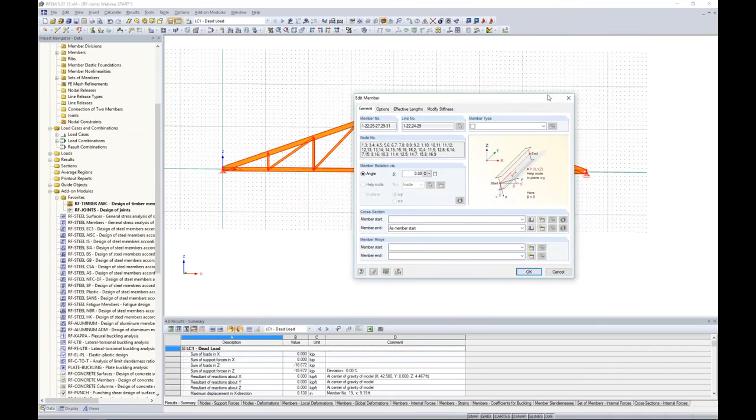The first thing I want to do is change this back to RFEM for simplicity, so I'm no longer in the add-on module. I'm going to select all of my members, right click, select member and edit. Remember that right now we have some truss members and some beam members. Well, in order to export my RF joint settings, all of my members need to be beams, just for the simplicity of the program. So that's fine, I'm going to set all of these to beams.

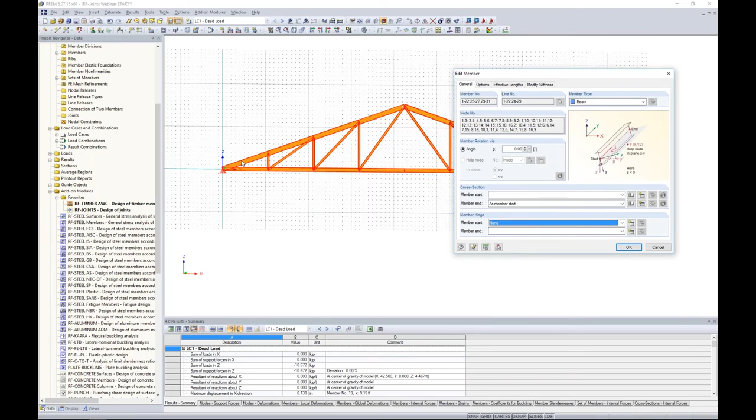Now the other thing I'm going to do is get rid of all of my member hinges. Remember, I applied member hinges up at the top here and up at the sides. So now every single member hinge will be set to none, and I click OK.

So we did do connection design at the top here and at the left and right of the truss, but I did not do connection design, simply for the sake of time, for these other members. So in order to get accurate internal forces, I need to hold down my control key and select all of these members that I did not do connection design for. I'm going to right click, edit my member again, and for this one I will add back in that moment release at the member ends. This is simply because I don't want moment transfer to my upper and lower chords.

Now for this one I did do a connection design at the top, but not at the bottom. So at the member start I'm going to add back in that moment release, and at the member end for this member I will add back in that moment release as well. So now the model is set up accordingly, and we can jump back into RF joints.

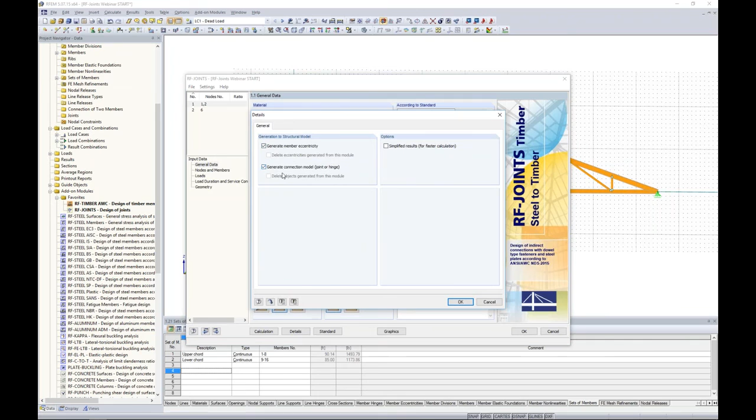Under the Details tab, we will generate the member eccentricity with the Generate Connection model. So I'm going to click OK, click OK, and now we get these funny little looking boxes where my connection designs are. So what is exactly going on here? Well, I'm going to turn this to wireframe so we can see this a little bit better.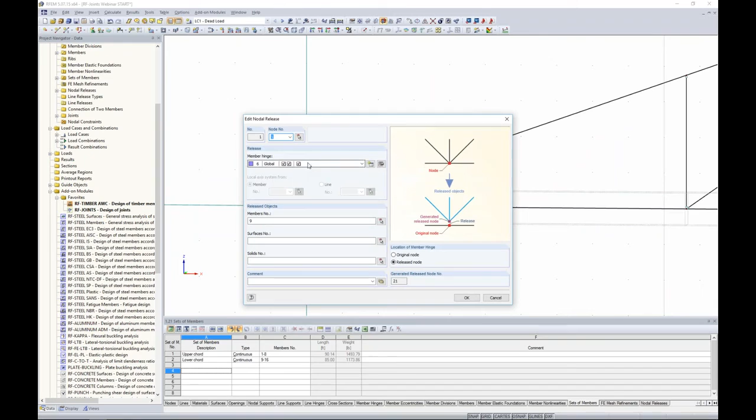Now, the first thing the program's doing, if I double click on this box here, is it's done a complete nodal release. So it has released member 9, my lower member, from this support. And instead, it's connecting member 9 with a little fictitious rigid link to my upper chord.

Now, the significance of the location of this fictitious rigid link is that this is the center of gravity of my steel plate for my upper chord and the center of gravity for the steel plate at my lower chord. So we're actually taking into account the geometry of that connection.

Now, double clicking on one of these other blue boxes, you'll see Edit Joint. So this is what's being exported from RF joints. Here's a nice picture because it can be a little bit overwhelming. We show you the generated member, the rigid member here, and more importantly, the member end releases for this rigid member is a partial fixity.

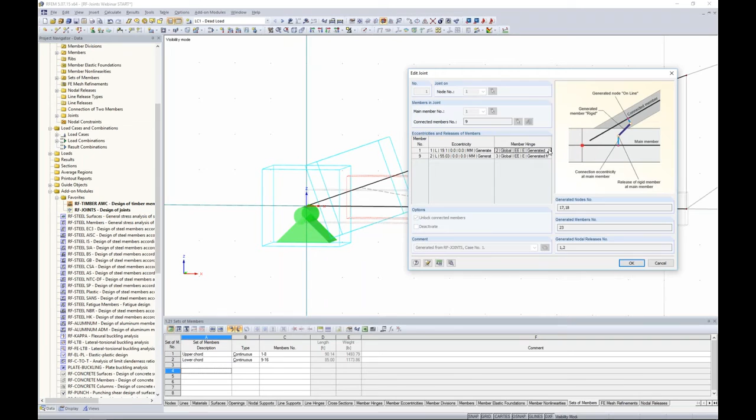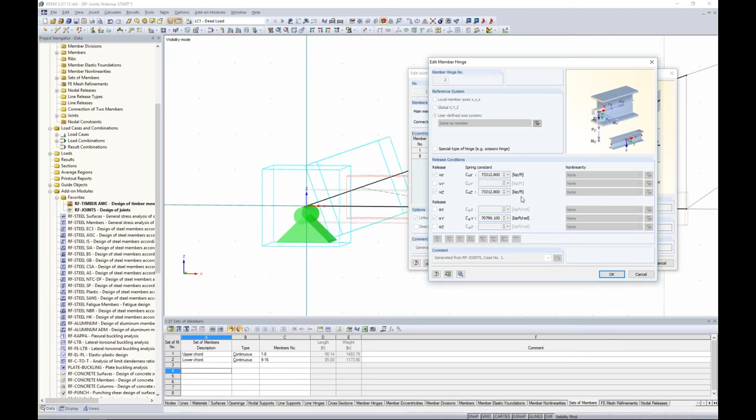And if I take a look at the details here, the partial fixity is based on the stiffnesses exported from RF joints. So the different degrees of freedom are actually calculated based on my true connection in RF joints. So now instead of representing my connection by a single node here with my nodal release, well, now I really have the true connection in the model based on the accurate stiffnesses.

So, pretty powerful feature, and I can take a look up here at the top. I now have all of these fictitious rigid links connected at the center of gravity for all four of my steel plates. I can double click and take a look at this joint. Again, I have four different member end partial fixities here based on the stiffnesses from the connections brought in from RF joints. So now back in RFEM, if I were to run a simple load combination here, my LRFD load combination.

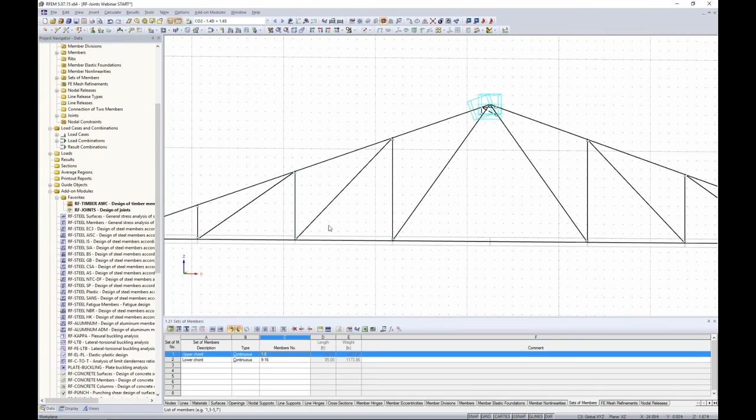Oh, one more thing I forgot to mention - sets of members. The set of members was automatically created, which I mentioned for our truss generator. But now that we have this nodal release up here at the top, the set of members for my upper chord is irrelevant. The program just gave me an error about that. So what I want to do is redefine my set of members as 2 separate sets now.

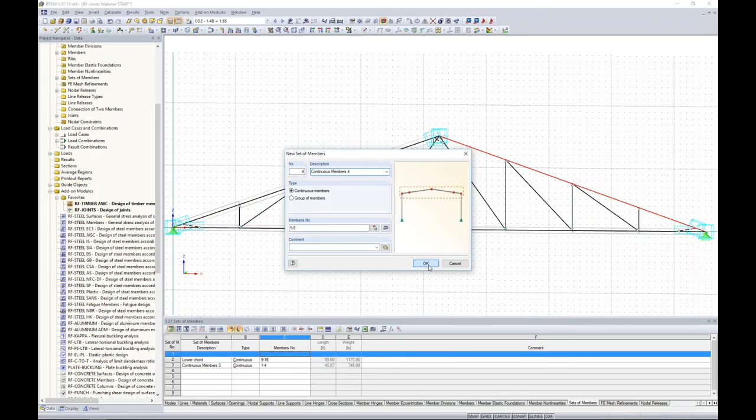So I can right click, create sets of members, 1 continuous member, but I need to create a second set of members here by holding down my control key. So now these can still be designed as 1 continuous member, but because we have this joint release up here at the top from RF-Joints, we can't create 1 set of member for this entire top chord.

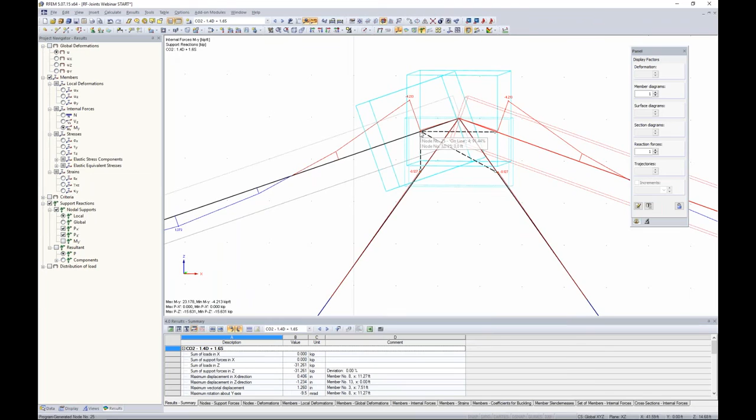Running the analysis again quickly in RFEM, we can take a look at our internal forces. Now you'll notice that the program will actually use these internal forces at the center of gravity at that connection. That's essentially what we want to represent with these joints - the actual stiffness that's going on as well as the geometry. Same thing down here. You can see we have a little moment spike as well as, if we're looking at shear, because we have a cantilever now from the support to the connection.

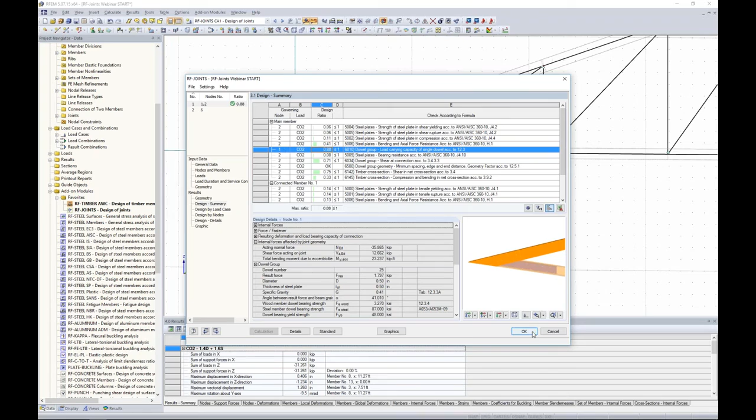Ideally, we want to go back into RF-Joints here. We can go to add-on modules, current module, and rerun our calculation for both connections. That's because our internal forces slightly changed now that we're taking into account the true stiffness. It looks like our code check is at 0.88, a little bit higher, but we're still okay in terms of our design. And we'd want to run the design for node number 6 as well. So again, a pretty powerful feature if you want to truly take into account the stiffness and the geometry of that connection back in your model.

Now, the last thing I want to show you before wrapping up the webinar is tapered and curved glulam members. The reason I'm only spending a couple minutes on this is because it really doesn't vary too much from the design we've already done, so not much time needs to be spent on it. But I do get asked quite often, how does your program handle tapered and curved glulam members?

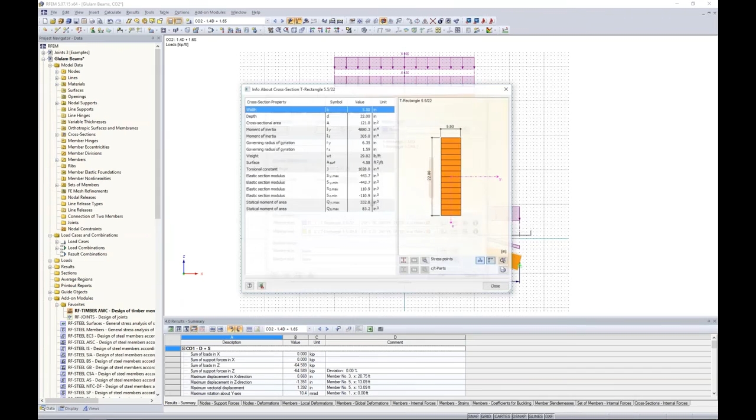Well, you can see that our first member here is just a simple tapered member, and how we define a taper is 2 different cross sections at the start and at the end. A pretty deep member we're looking at here - 22 inches in depth for the start, and at the end we have a depth of 49.5 inches. Again, it's assigned as a glulam material, so the program automatically recognizes that.

As far as the curved member, these are 4 different beam elements. So again, I created a set of members so I can do design for this entire beam as a whole rather than each individual member.

Now jumping into the RF-TIMBER AWC, I have already created 2 separate cases. The first is tapered glulam, so I'm only doing design of my member number 1 for my first case. And under the second case, curved glulam, I'm doing design of my set number 1. You'll also notice I'm running LRFD for my curved member here, but my tapered member I'm running ASD - so you can even run different design methods within the program if you'd like.

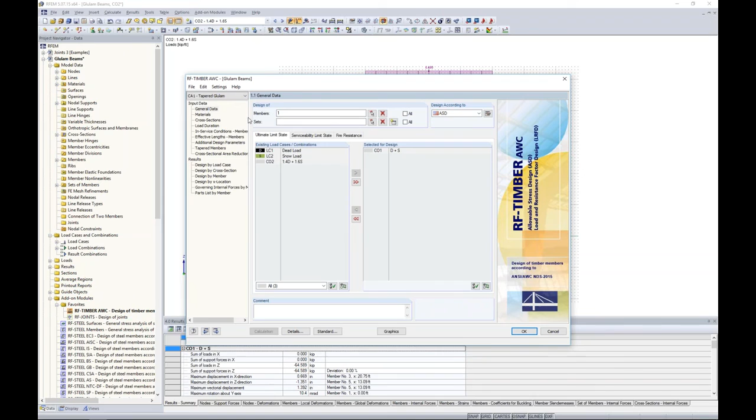So there are 2 different distinctions with the curved and tapered glulams in comparison to our straight, typical members that we did before. The first is under load duration - you'll notice now that we have a loading condition for radial stress design. If we use a drop-down box here, we have two options: other types of loading, or wind or earthquake loading. This simply comes from table 5.28 in the code, and for tapered members it's important because it's needed for stress interaction factors from 5.3.9. So you can specify that type of loading here.

Now, the other thing is that a new table was automatically created because the program recognized this is a tapered member, called 1.10 tapered members. Simply the cross-section at the start, cross-section at the end, the length is automatically brought in as well as the angle of the taper. Now there is one thing we do need to specify, and that's just the grain parallel to edge.

As far as the design, we can jump down to design by member. Really not much is different, other than our code references. If we take a look at some of the code references here, you'll see equations from Chapter 5, which is the glulam chapter, in reference to tapered and curved glulams as well, and the program automatically does those checks for us.

Now the other thing to jump to is the curved glulam. Again, two differences: load duration, and we have the radial stress design. This is a little bit more significant for curved members for the radial tension stress capacity.

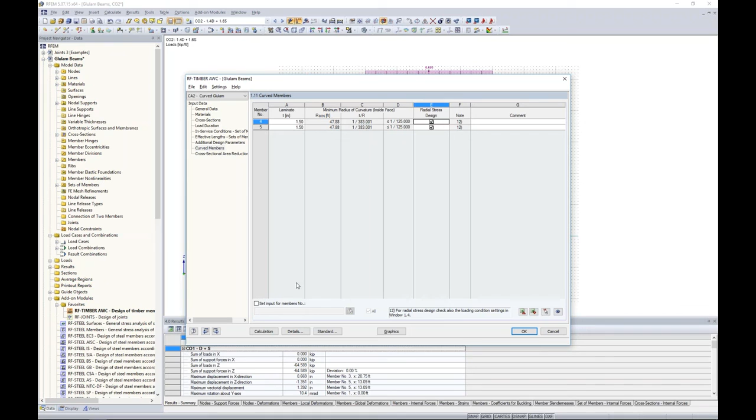Running the calculation here quickly, nothing is different in terms of taking a look at our results tables, other than our code references to Chapter 5 for the glulam members. So I just quickly flew through that, but the reason why is that not much changes, and the program automatically detects these types of members and points you in the right direction for your user input.